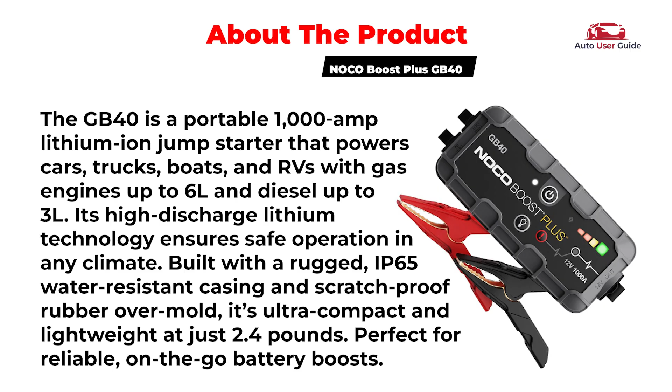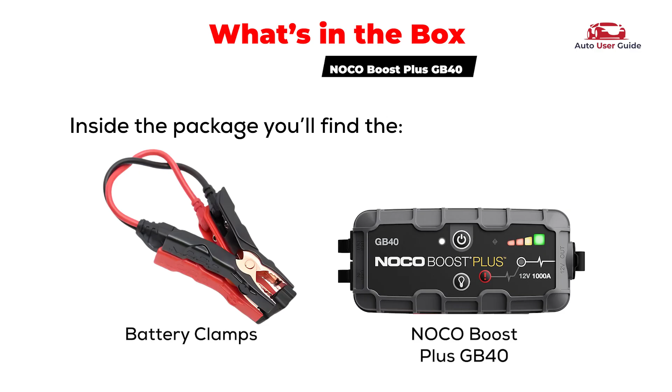What's in the box? Inside the package, you'll find the NOCO Boost Plus GB40, battery clamps, microfiber storage bag, micro USB cable, user manual, product description, internal battery level, error LED, power button.

Power LED, boost LED, manual override button, light mode button.

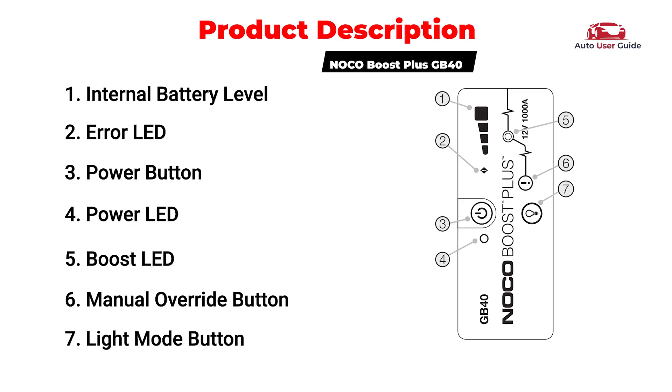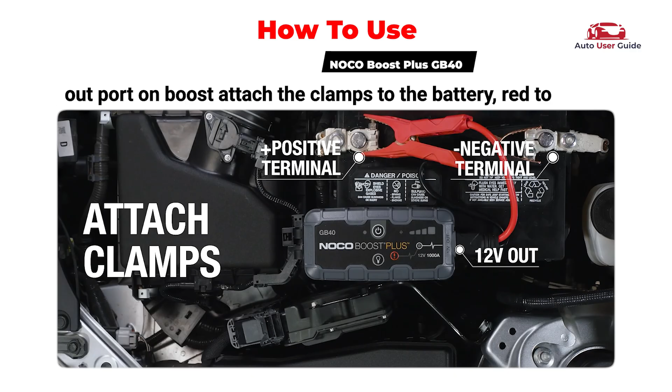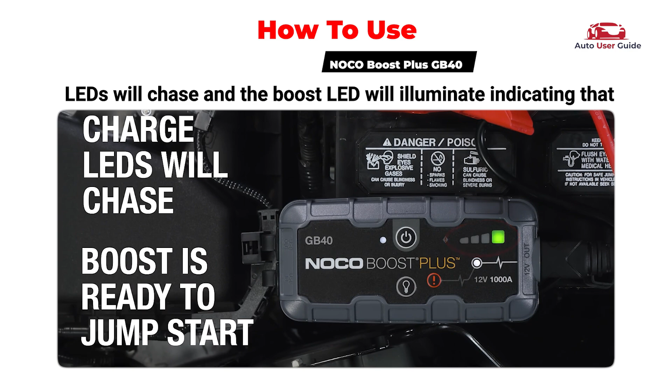How to use. First, with the clamp assembly firmly connected to the 12-volt out port on boost, attach the clamps to the battery, red to positive, black to negative. Next, power on the unit, the charge LEDs will chase, and the boost LED will illuminate, indicating that boost has detected the battery and is ready to jumpstart. Then start the vehicle once the vehicle is on, power off the unit and disconnect the clamps from the battery.

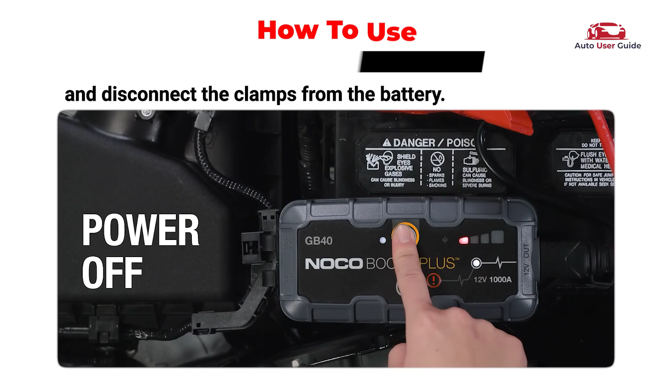How to recharge. First, locate the USB port on the left side of boost and connect the micro USB cable. Plug the other end of the cable into a phone charger, 12-volt car adapter, USB charger, computer, or any other powered USB port. Once connected, the charge LEDs will start to slowly pulse. A full charge will take approximately 3 hours and will be indicated by a solid green LED.